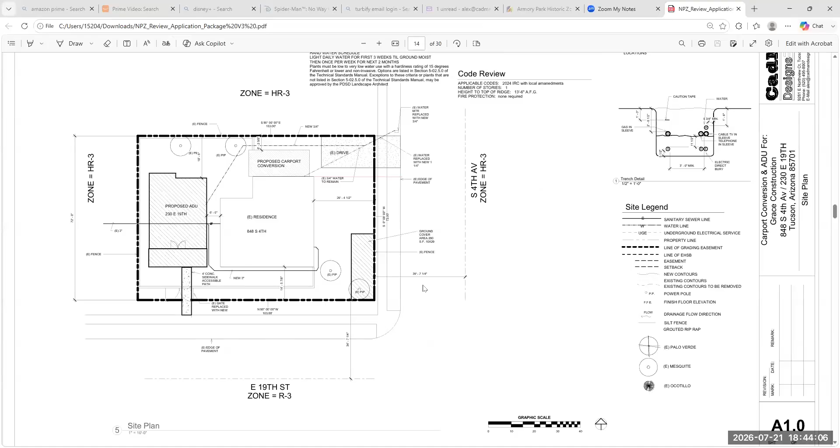So yeah, right away, as Michael brought up, moving that addition back, I did only move it 10 inches. So if that's a concern, we can definitely look at either moving it back more or turning it to stucco. I'm okay with stucco, however, I think aesthetically it won't look very appealing to have it all brick and then that part stucco, because it's going to look like a big eyesore. So I would be more open to just shifting it back.

You are correct that the 10 inches is to stud, so if we had a 4-inch brick, that means we'd only have 6 inches of recess. With that being said, I'd be okay doing a whole foot or two to give it good definition as a face veneer, if that's what we're looking for, because what I have here is only 10 inches.

Quick question - that drawing shows the rear facade flush with the existing house, but on your revised site plan it shows it pushed 2 feet back. That's just an error, this is line work. The other thing is the 3D, so that would be incorrect on how that's represented.

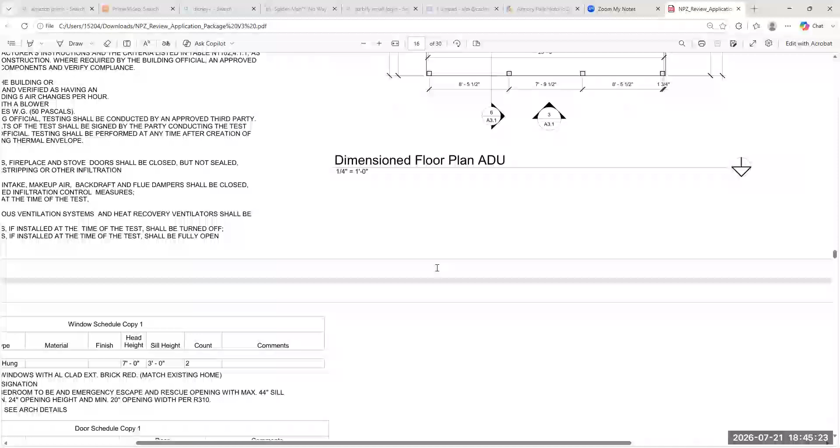I noticed the drive didn't change either, and it's still in front of this area, correct? Yeah, that was one thing - when I took my notes in the last meeting, I didn't take that down, then I saw it in the comments and didn't know what it was for, couldn't recall at all. I recall that's all existing, so it's not anything of concern. And we're not planning on changing the chain link fence in the front yard of this building.

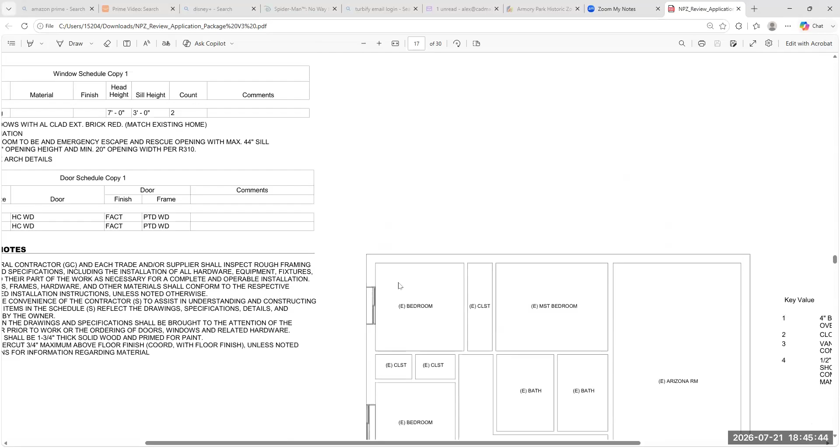No, nothing like that. The driveway will remain. So you'd be willing to push the whole area back and then maybe do a different facade in front, but perhaps brick or a brick and stucco combo on the other sides? Or wood siding? What do you think?

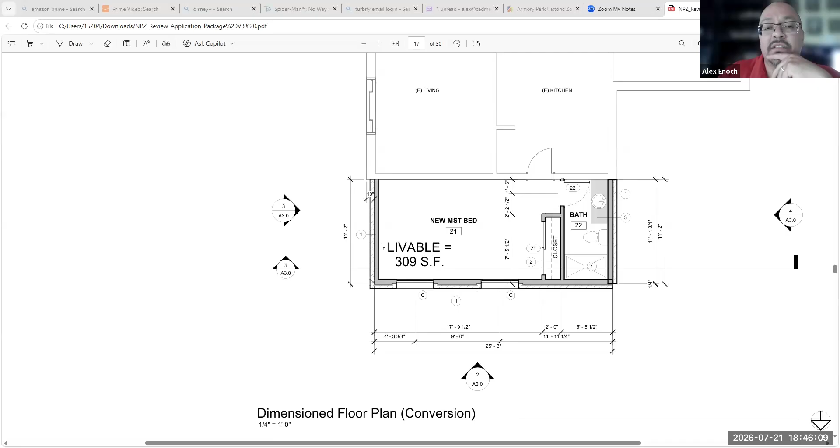I think I would definitely like to keep the brick in the front, just for aesthetics. It's gonna look ugly once you throw stucco and wood siding in there. Wood siding's not good in our weather, of course. But if we're okay with doing the brick on this side and then wrapping like 3 feet and then the rest stucco, I think that would be fine.

If that's what we're looking for. As far as pulling it back a couple of feet, right now that room space is 17.9, that's more than enough room. So if we can go up to like 15 feet, it'd still be a decent sized room for a master in that area.

So what is that strange notch in the back, in the northeast corner, where the brick faces you're showing don't meet? You have a notch in the corner. It's just the way the program didn't clean up. There's nothing special happening there.

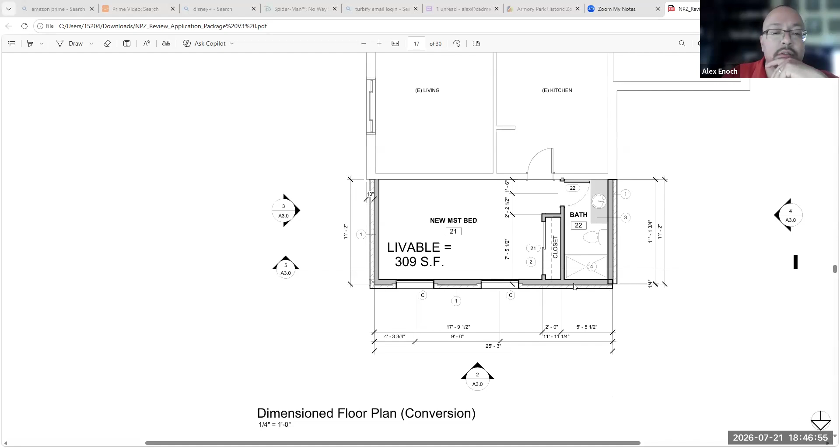Okay, any comments about the planning department's recommendation that you put some sort of fenestration and not leave a blank wall in the carport area? What do you mean? Well, Michael just outlined it, that a blank wall is not something we normally approve on a front facade of a building. I mean, adding a window here.

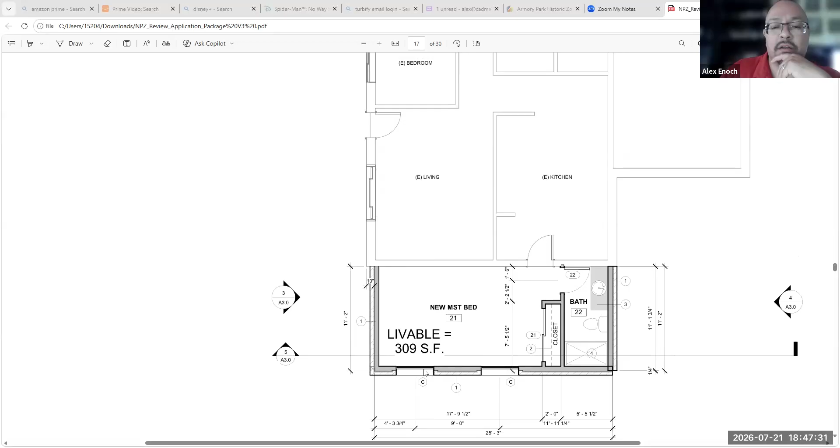Yes, yeah, I don't have an objection to that. If anything, I would like to have just one single window here and then lose these two. I think that'll allow us to set the furniture better in there anyways.

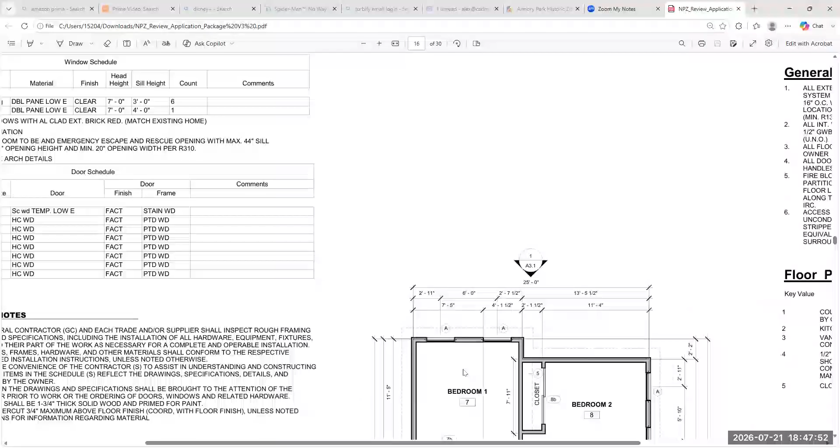Well, then you would be creating an entirely blank face on the south. And I realize that your Arizona room that was added in the 70s doesn't have any windows on it, but you're still presenting a lot of blank brick walls here. Although you should correct your plans, because there are windows on the south side of the main house.

That blank wall you're speaking of would be on this side then. This is right up against the neighboring property, and it's actually heavily vegetated right here, so you would never see those.

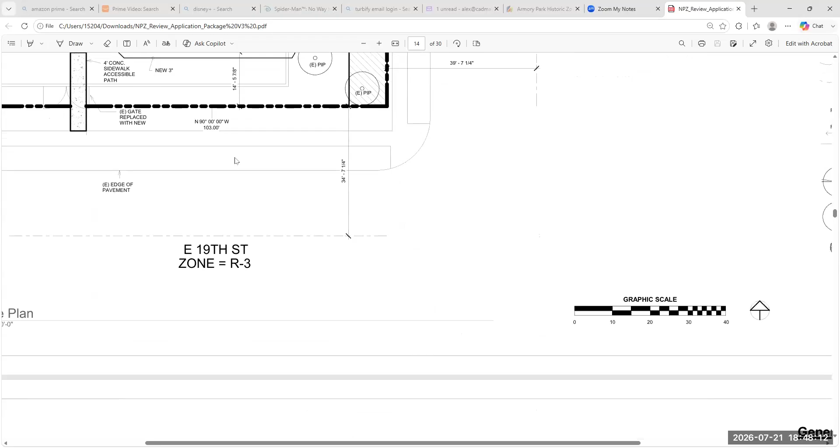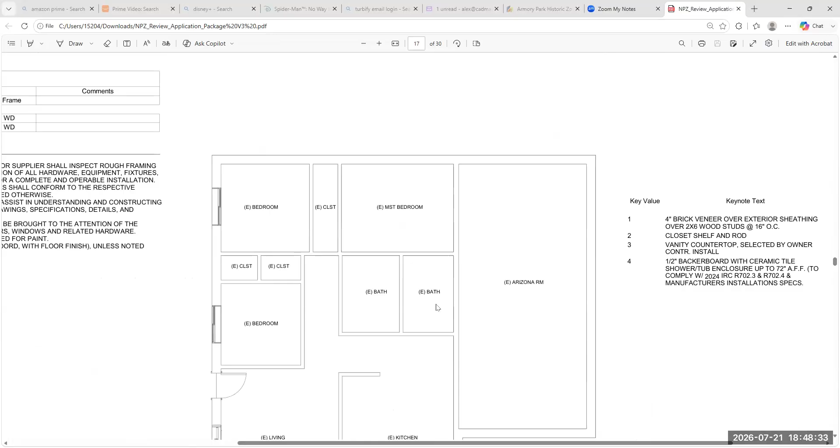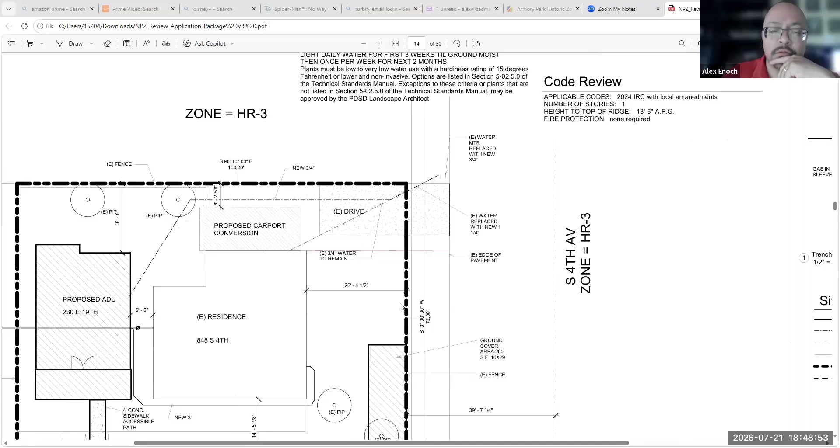Well, it shows up in your photo of the back that there is a porch there, and a window, frankly, probably in the shed that you're proposing to demolish. Have you been there? I mean, I focus on what's part of the work. We're not doing any work over there. Okay, which I ask that you focus on as well.

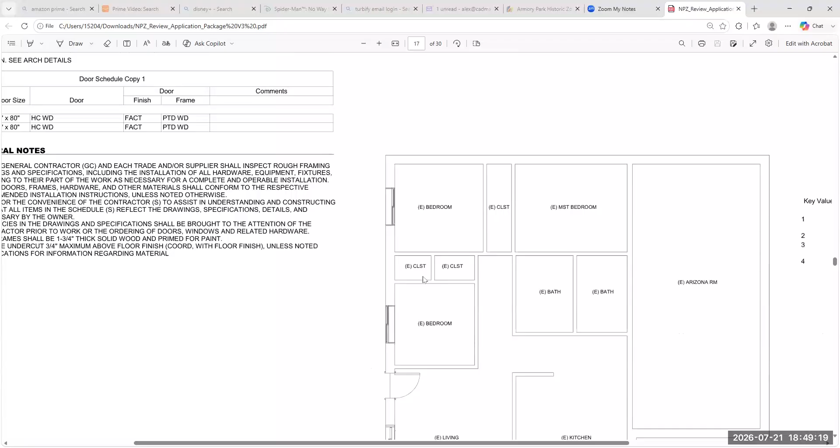Okay, and the other thing Michael mentioned, one of our conditions is that the window configuration should match the historic window configuration, which I believe is vertical paneled. I believe currently there's sliders on it because of the age of the building, it's in a wonky construction, but they are vertical panes of glass instead of horizontal panes like you're proposing.

Okay, so we can lose these two windows and we'll throw a slider here, and I'll shift this back 2 feet to give it some more reveal. Well, we'll have to clarify materials because there isn't a materials list yet.

Okay, I'm going to open it up to the board for comments. I still have a bunch of questions, and we haven't even gone to the ADU.

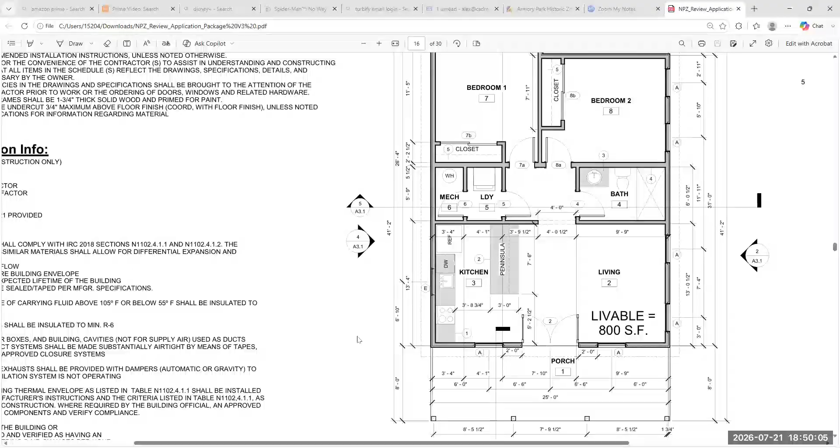I will say that when we said turn it around so the entrance is towards the south, in my mind I thought it would be more of a mirror image. So now all the windows are facing the blank brick wall of your Arizona room, and there's hardly anything on the west side. But just a comment. Okay, Stan, you're first.

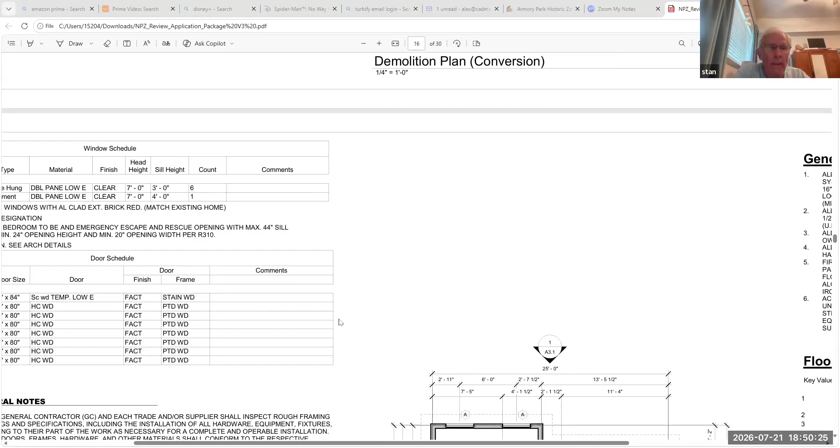Yes, I had the same comments that you had on the setbacks versus the floor plan and the site plan, and also the windows. So I think that's been taken care of.

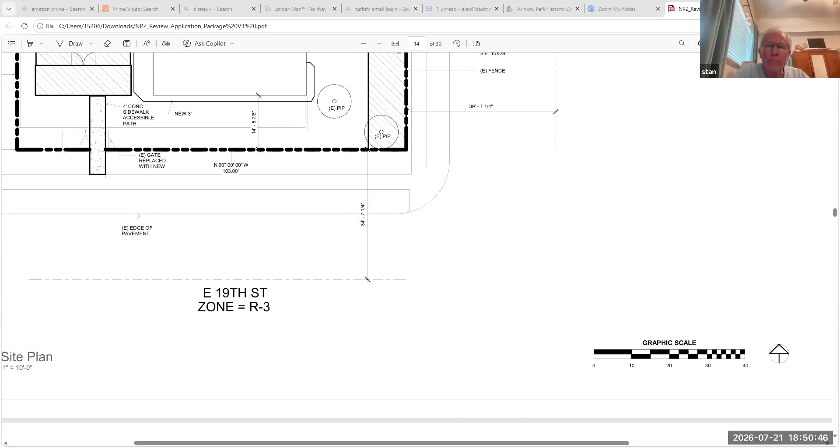The other questions I have are dealing with, and this doesn't affect any approval of yours, but I don't understand the new water service. It looks like you're going with a 3/4 inch water line, but you're going to add a new 1 1/4 inch water line on the property, yet going to the water meter. Then what happens after the water meter? Are you going to put a new 1 1/4 inch line from the water meter to the main?

I don't know how this relates to the HPZ review. I'm just saying, from a standpoint, are you going to dig up the street? Because if you're going to do it, you should do it now.

Yeah, there will be a right-of-way permit for it when they dig up the street. Okay, but you understand that they're doing the paving here real soon, which will put a 5-year moratorium on digging up the street. And they're paving that'll be it. That'll be a city comment and the contractor to deal with when they go through that route. Okay.

And the other question I have, it deals with the utilities again. You got a sewer line that you're showing coming out of the bedrooms on the south side that's going around to the house. I'm not too sure I understand that.

Again, then how does this relate to HPZ? I'm sorry, how does your question relate to HPZ? It doesn't affect it. It's not going to change the approval one way or the other.

It's just, I don't understand why you're drawing that on this plan right now that shows it coming from an existing line, I'm assuming a 3-inch line, and you're coming along the east side of the new ADU and then going along the south side of the existing house and then into a bedroom. Is that a new water line or sewer line that you're putting in?

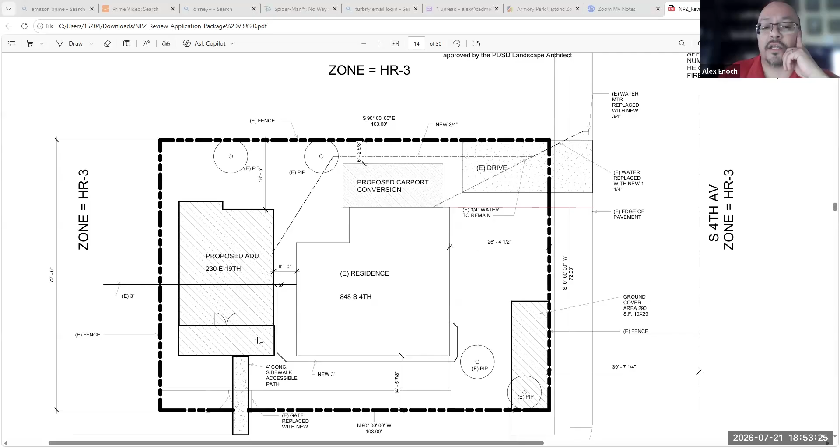This is two projects, so we got to make sure we deal with the addition first, and then we'll move on to the ADU and the ADU questions. Okay, then I'll clarify it for the board.

Stan, can you unraise your hand? Other board members, questions or concerns about the main residence, fenestration, setback, blank wall, brick options, etc. Who wants to start?

So let me just add, Mr. Chair, that consistent with what Stan was saying, if you look at the staff report on the enclosure, we're also of the same opinion like Stan that if a gate is being proposed, the applicant will need to provide the elevation for the gate.

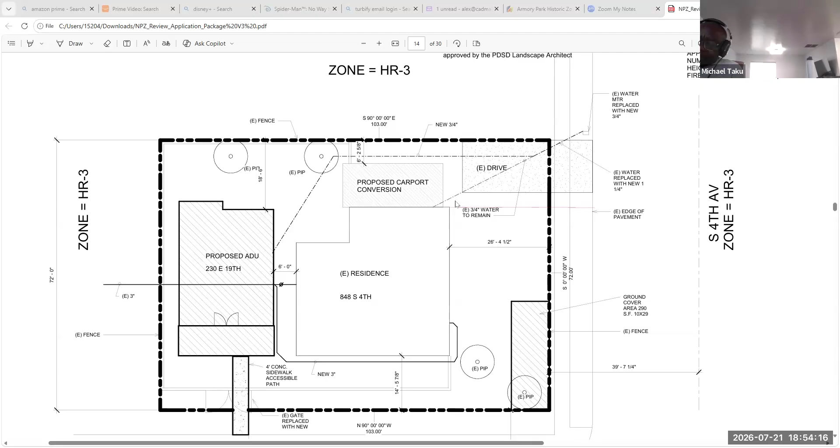This is true, but Alex hasn't yet presented the ADU. We would defer that discussion. Okay, Alex, why don't you go ahead and finish that part of the proposal and then we can talk about anything.

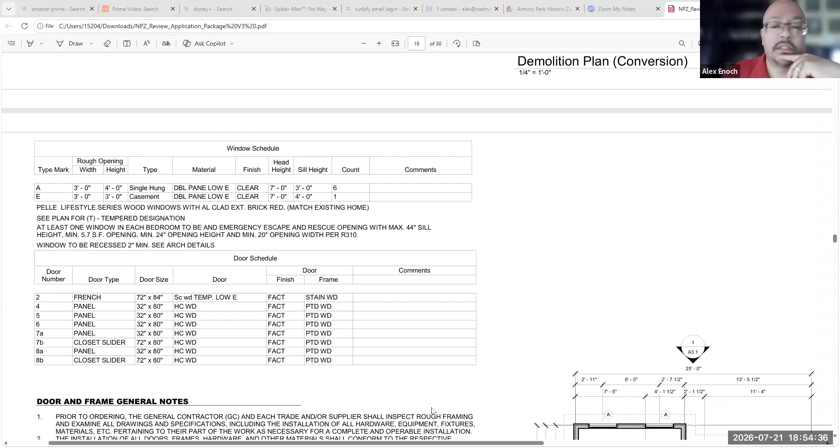Okay. All right. So yeah, that was the comments that we had to deal with for the addition, the pop-out window, and then you wanted to make sure it was brick or veneer, so I just made sure to clarify that now with my details in the plans.

So let me go to that part here.

And the brick that you were proposing, is it similar in color and size? It will be, yes, 100%. Okay, I'm gonna try to get closer if anything.

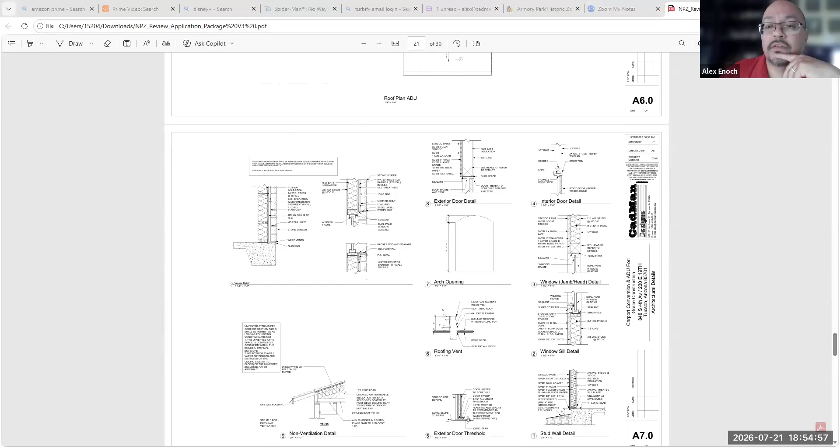So here now I've called out the anchored stone veneer. So it'll be a solid stone brick veneer, but it's the 4-inch anchored. It's not adhered. That's what the details will call for.

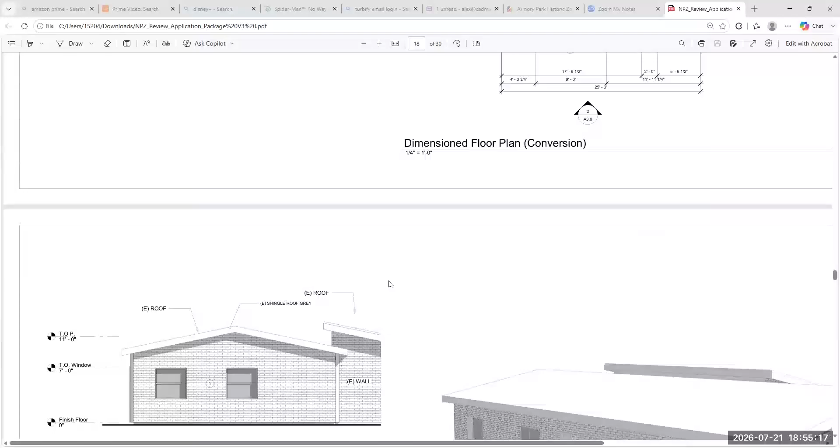Okay, go ahead and let's walk through the changes to the ADU, because it looks like it was just a 180 flip. Pretty much, yeah, because that's the comment we received on it. So we had the comment to rotate 180, so that's what I did. I did rotate it 180. We had to change the access.

So now I'm utilizing that gate that's there. That's the access right off of the street. And then we wanted a new gate. I did call for a new gate. That's what this note is saying, existing gate replaced with new.

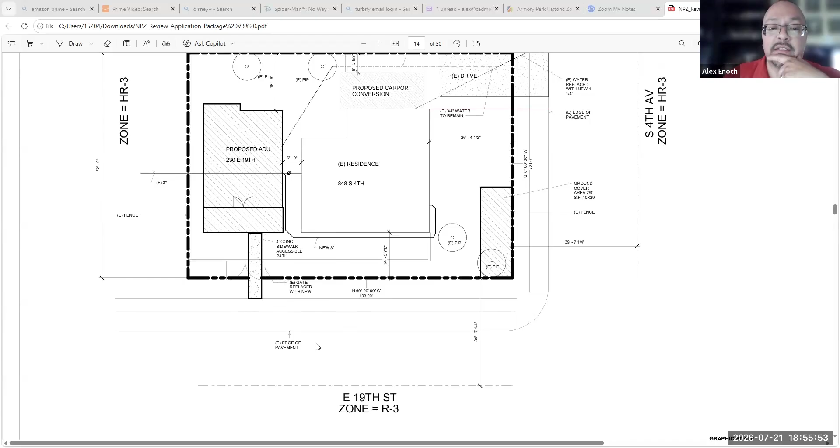However, you're right, I did not provide any sort of detail on what that gate will be. So if we want to see something, I'll have to get that from the contractor, since the contractor is the one doing the work on this. And that you don't have. Okay, yeah, that would have to be turned over for a minor review for the replacement of that wooden gate.

And something else with your program, it says the north setback is 18.6, but because that bump out for the one bedroom is 2 feet 2 inches, it's actually 16.4 for your setback from the north. I assume they were trying to line it up with the main building when the drawings were done on your plan. And can you tell me, if you're allowing 6 feet between the old residence and the new residence, what is your western setback?

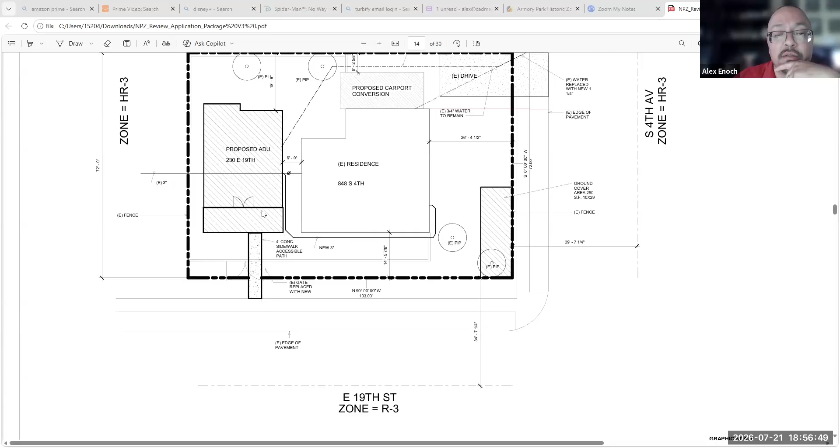5 feet. It's still the same setbacks as it was. It was 5 feet building, then 6. So this is still 5 feet over here. Okay, yeah. And then what this is, is I'm flushing out the porch that's there to the face of the building, so the building itself is set back quite a bit now.

Okay, so your kitchen window will face the western wall, but bedroom 2 will face the back porch of the main house, and the door to the kitchen and the living room will face a blank wall. Is that correct? Yeah, really close in proximity. I mean, if anything, I might even want to just lose these and move this one over here, because it's really close. 6 feet's really close.

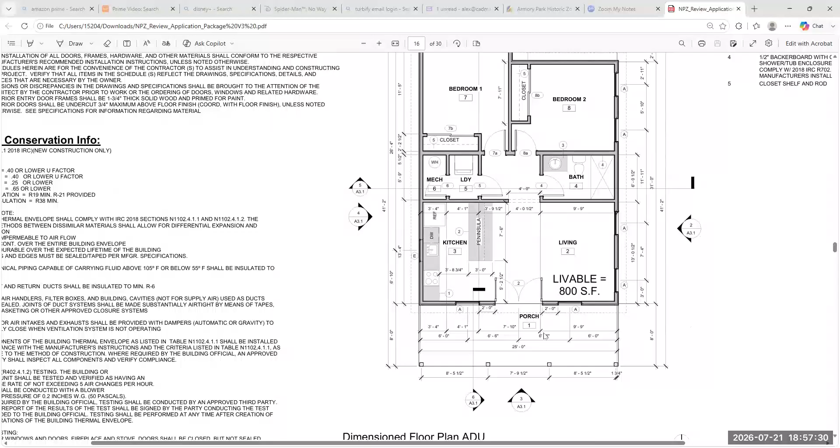But this is the side that faces the street now with the porch, the doors, and the 2 windows. Well, all of these things are little things that if you want to continue to change, you can always ask for yet another continuation. Anything else on your revised plans before we get to the board? No, I think that was your guys' comments that I dealt with. Okay.

All right, I'm going to go through roll call. Stan, you've addressed the fence and the pedestrian access, which will mean we'll have to do a minor review for any gate that goes in there. Yes. Anything else? No. Okay.

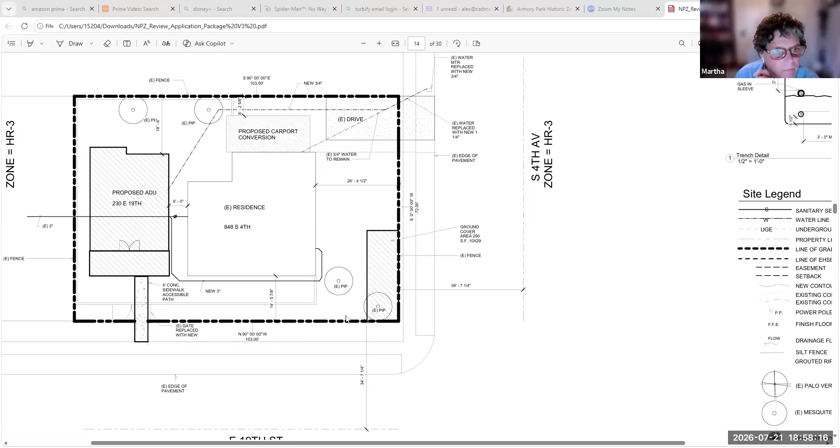Martha. Nothing is coming to mind. What are your thoughts about the staff comments on the replacement extension for the main house? Who, me? Am I the one to ask questions? No, just teasing. Going back to trying to keep up on my own with the plans.

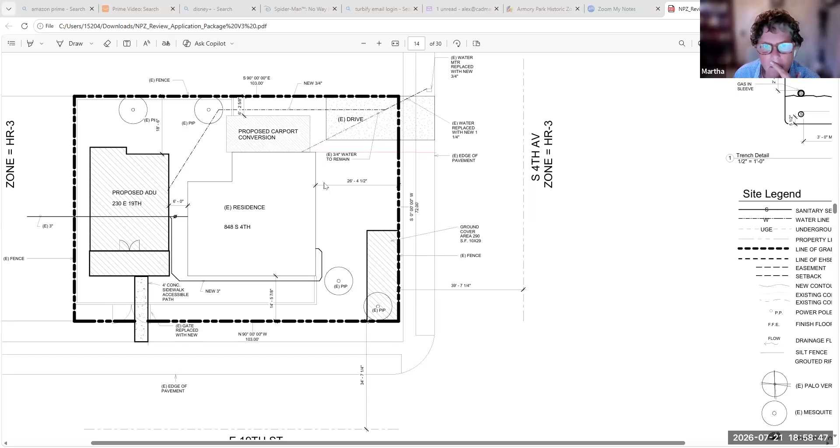So may I see the extension again from the main house? The plan of it, this one. Yes, porch, here's the bath. So we could put a window in it and stucco it and close up one or more on the north side, or stucco the whole thing, or set it back 2 feet into a smaller room, still with a brick facade, or thoughts?

Well, I don't think everything has to be stuccoed. I would think just maybe even a change of brick style would be noticeable, and it wouldn't be trying to be a false representation. So that really is... I think a window would be lovely, but I also believe that the people that want to build something should mostly be able to build it. So thank you, I'm done.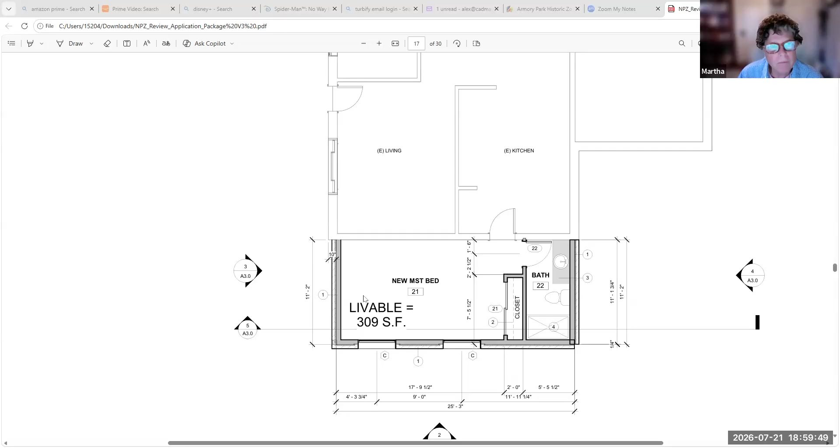Thanks, Jan, questions? Yeah, I actually brought up the window thing at our last meeting and I thought it was included in the notes, but I wasn't at the meeting and missed that. But I do think the window would be important in terms of just reducing such a long, expansive blank facade, a window of some sort. I also think setting the room back a little bit from the front more than it is now would help, be at least slightly reminiscent of the carport and show it as a distinct, separate structure.

If it were set back, I don't feel strongly about a materials change, if it were set back noticeably. Let's see, there are other options. It could be a brick pony wall with stucco above on that facade to differentiate it. Brick, yeah, I do. It's a long facade otherwise, especially without the windows, and kind of unusual. But yes, you're right, there are other material options they could explore if they were interested.

The discussion about the windows, and maybe there'll be some on the north, maybe there won't, maybe there'll be some on the east side, maybe there won't.

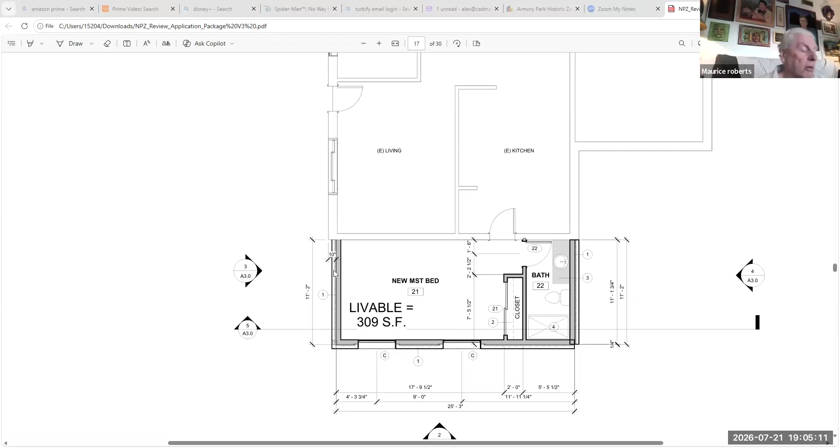Yeah, this is what I think. Okay, Matt, comments.

I only have one comment, and I'll get clarification from the rest of the board if I'm missing something, but I thought lots that were under 6,500 square feet had a max square footage of ADU of 650. I think that was the original proposal, and I think the state law changed it. Am I correct, Michael, that it now can be somewhat smaller, but it can be substantially larger than the original ADU law? That is correct, Mr. Chair. Okay, good, then no other questions.

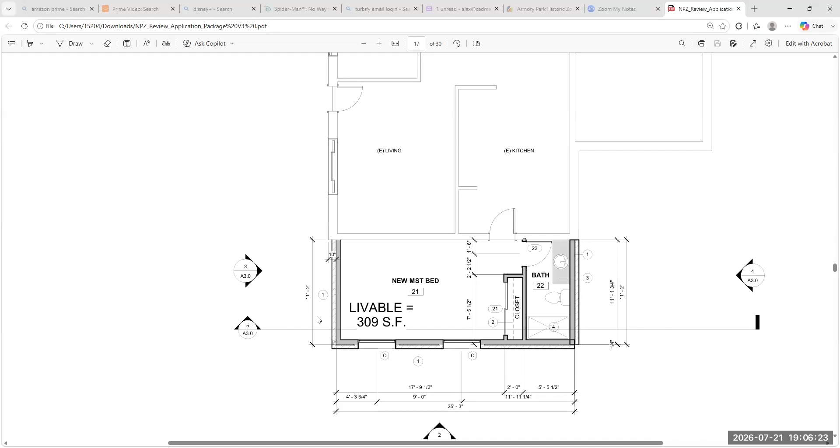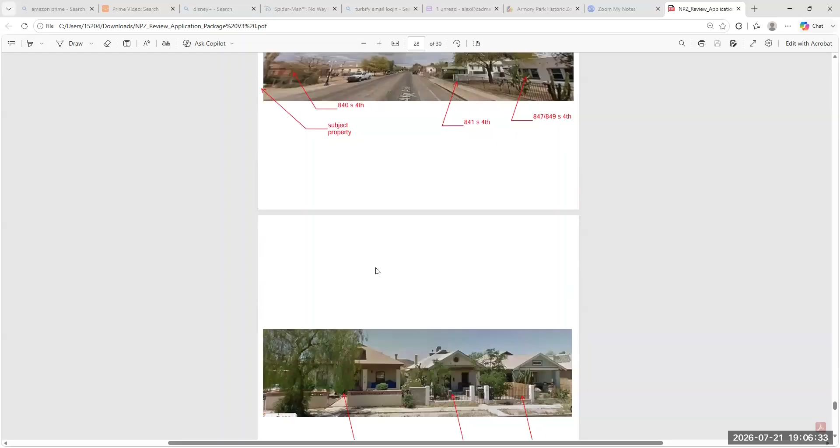Okay, Lynn, comments? I got confused, as usual, about what the carport is made of. Well, it has a single wood post on the, let's see, northeast corner, and then the back of it is supported by a masonry shell that houses a shed, with a space between that and the backyard that you can walk through.

Although it looks currently like that back wall has been filled in somewhat, and in fact, can you show us the backyard photo? Yeah, you can see there's a wall there or something. Now it shows that there's actually a window in that shed, and it's not brick or may not be brick. There's another photo that shows the back of it. There we go, and they've added the electrical panel where the old walkway was. No, I guess the walkway is there. There's a window at the back of that shed. It's either painted black or it's wood battens instead of the masonry that they're showing to demolish.

It has the electrical panels and another metal slider window. You can see there is indeed a kitchen window and a door into the Arizona room that has

horizontal sliding under the porch, which PDSD has talked about. The odd angle above the eave also has wood siding on it on that north face, and we never got that elevation for us to see, but it does have a brick pony wall. So we're talking about all sorts of different options that will make this somewhat consistent, but also read as a

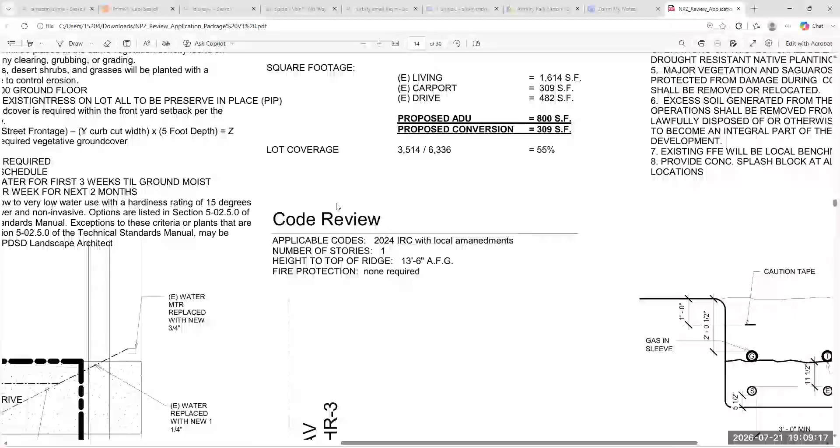It has, I think, a picture window in the living room with two side vents, and then there are apparently sliders in the two bedrooms, and also sliders in each of the bedrooms on the south side that aren't shown on this plan.

And are they metal? Yeah, it looked like they were anodized aluminum metal. Yeah, okay.

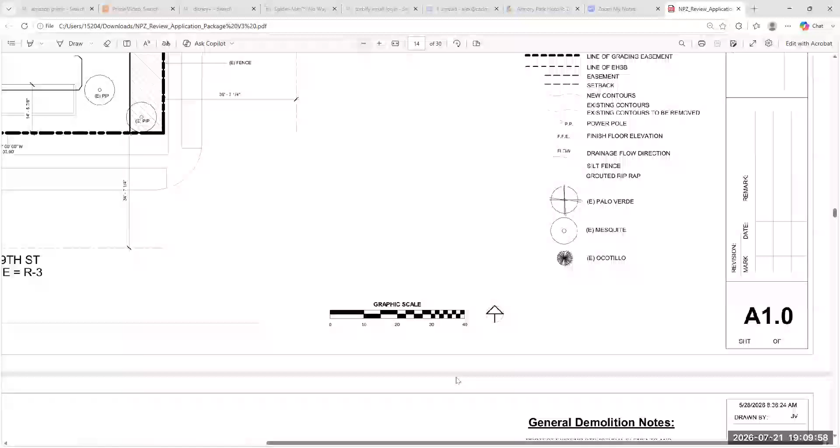Well, we can't really approve aluminum per the code, but we could do metal windows or clad wood windows that have that same sort of vertical configuration for whatever is done on the main building so that there's a compatibility factor.

What do you think, Alex? Yeah, I like that. That's set. Well, I'm going to nix these guys. I'll throw the slider over here that matches these guys over here, which are 4x4s.

Could put it right in the middle, maybe one in the bedroom, but leave the center one, or do something with that on the north wall so you don't present yet another blank wall?

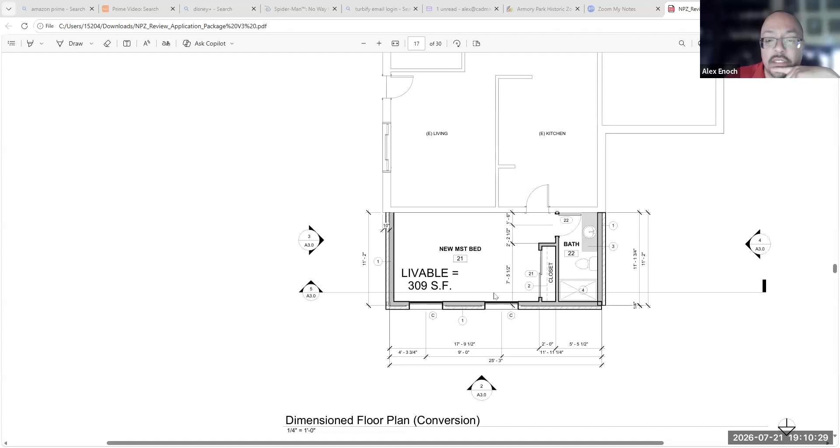Okay, that's fine. I'll nix this one right here, and we'll keep this guy, and then switch this one to a slider, and you could leave the same footprint with a pony wall with horizontal wood siding above that, to match the north wall of the Arizona room.

Agreed. Okay, do you want to tell us what you're thinking? If you've got your contractor on the phone, can you tell us what you're thinking for your pedestrian gate? Is it a single gate with a fence in that 6 foot, 8 foot opening? Is it made out of metal? Is it wooden pickets?

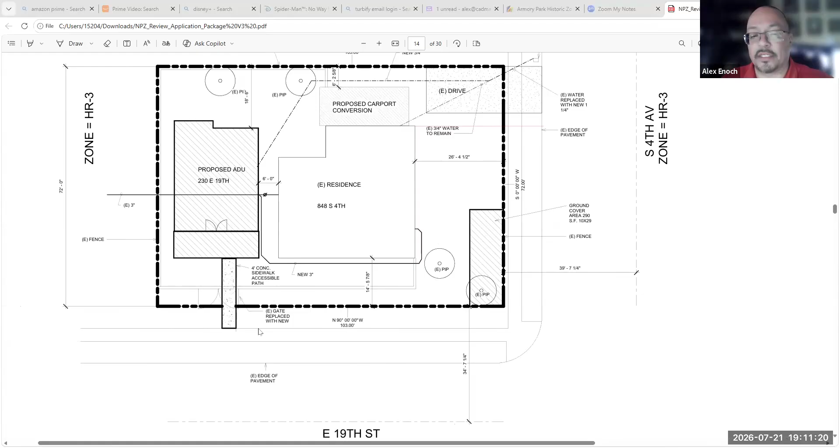You'd have to come back and meet once a revised plan and a motion is made tonight, then it goes to PRS, the plans review subcommittee of the historical commission, and they make all their comments. Then a member of that commission and a member of this board will come and see your plans for your pedestrian gate and say yay or nay or how to change it, because we did request that last time and they are not here.

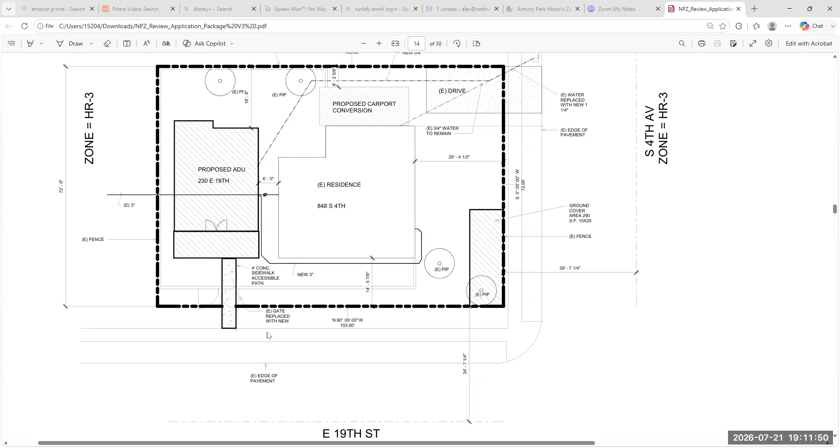Yeah, that one I would, because I doubt I might get enough information from him for you guys to say yes or no on it. So that one I would definitely do as a separate review, and just do these ones.

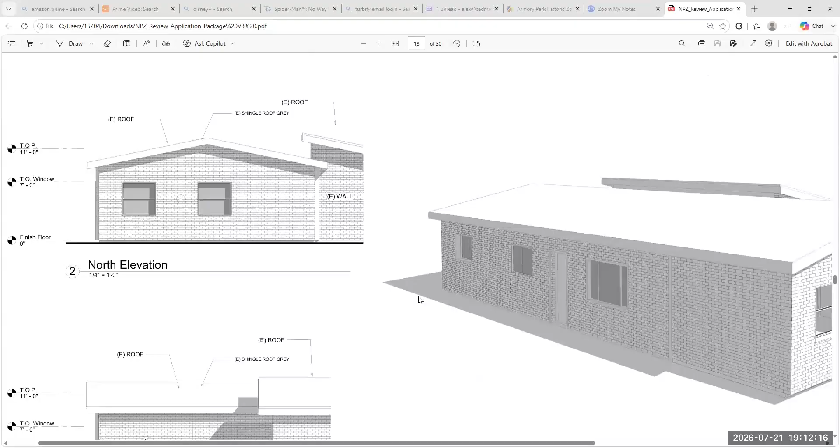Okay, so you're willing to do metal clad wood windows in a vertical configuration like casements for the main house. There's no problem with the windows on the ADU, they're appropriate, you already did those, and they can be separate styles.

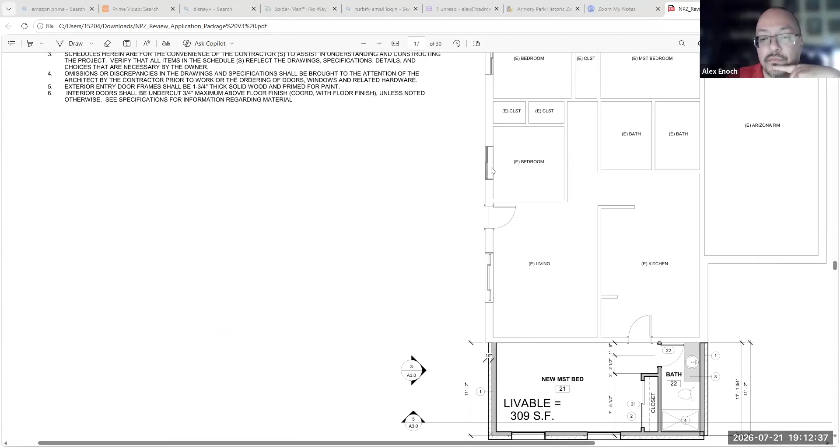Correct. Okay, but the windows you put on will at least match in configuration the existing on the house. Correct. Okay. Is anyone writing this down so we can make a motion?

I'm trying. I'm trying to, but I still have a question.

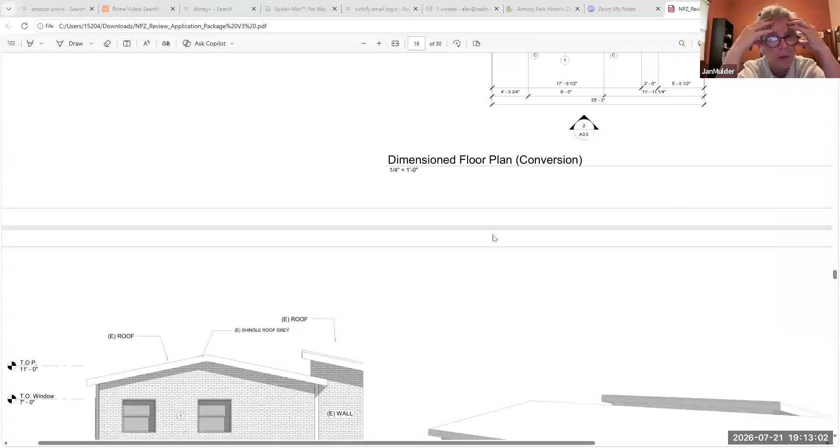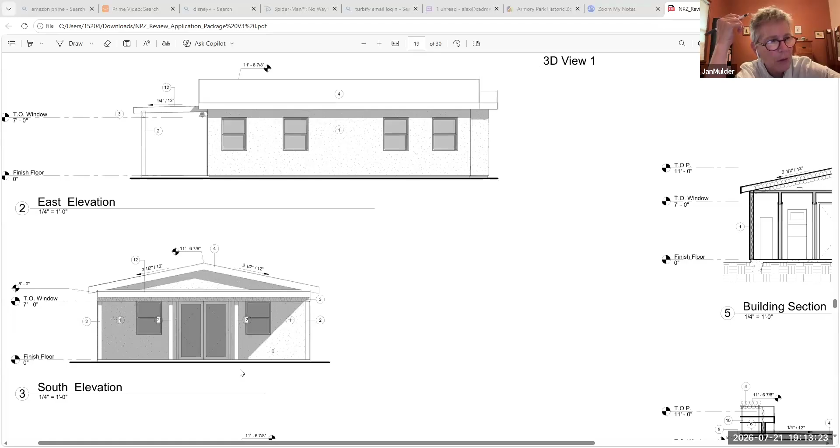Okay, sure, Jan. I'm gonna be the nattering school marm on this one. Right now, the front of the ADU has a high wall all across the front of it, and this is presenting as the front of this dwelling unit. It seems like it needs to be addressed more than just a pedestrian gate. Leaving it till after the builder has approved plans to maybe have a minor review at some point just makes me uncomfortable.

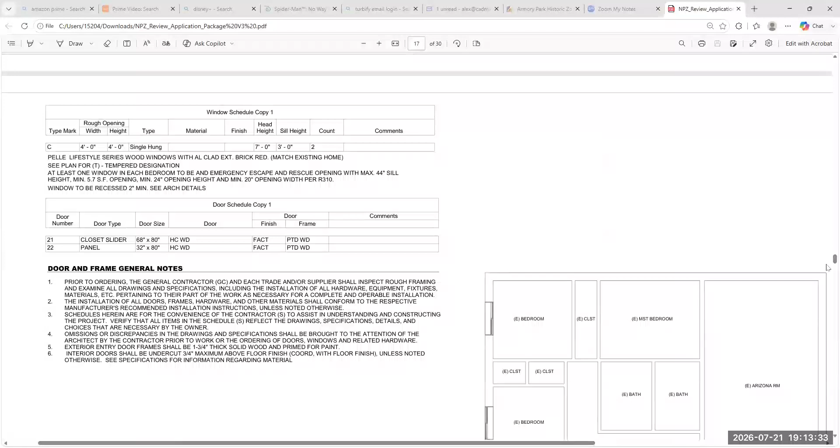It's tough. It's an 8-foot opening because it was an access gate wide enough for a vehicle. I don't know if the photo is on this particular set of plans, but there it is. It's got some rotten cedar gates on it, with two posts on each side.

So if that goes away and there's a see-through fence that you can see the front of the building from the streetscape, theoretically they meet the code. With just that, they could have something totally opaque except for the walkway. No, they would probably need to infill that with something open that would give a street presence.

Right, that's what I'm thinking. I'm just saying this feels like more than a minor review if the project is getting approved. You're basically hoping they come back.

Alex, do you think you could put in a simple metal open barred fence and gate in that opening that is no taller than 4 feet? Yeah, definitely. I'm okay doing whatever you guys want on that one, whatever helps you guys get satisfied.

Does that seem reasonable, Jan? Yeah, so 4 foot tall, open metal picket fence, simple style. You want them to have the gate and fence offsets, right?

You can put the gate on one side with a post and then a fence, or you can put it in the middle and put two little side panels. Either way, that's what I think will look nice. Have it centered in that space.

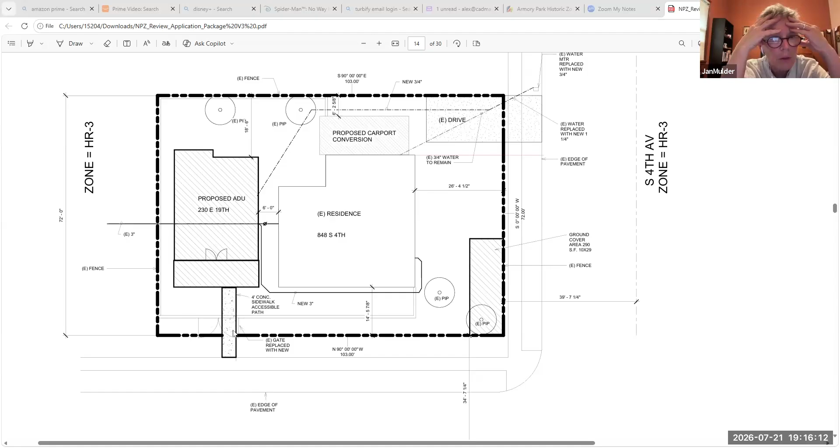Okay, some panels in the gate panels. Well, all I was thinking is we don't have to prescribe it if it turns out the opening is slightly offset, but we could certainly do that. We don't have to tell them exactly where we put it.

Just the appropriate fence that's open and visible, with a pedestrian gate, and you can see the front door of the house that way. Okay. Do you have any ideas about lighting fixtures or door hardware or anything?

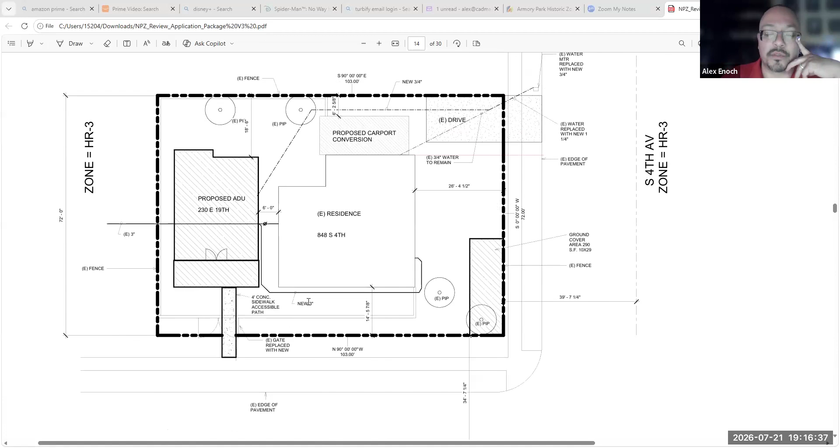No, not on that part. That's something definitely the GC will present. Okay, then hardware and fixtures on the ADU should be historically compatible.

Should we add that? Or staff? Michael, what do you think? Should staff do that one? There's a lot not here.

Historically compatible with what, the age of the main house or the neighborhood? Probably more with the neighborhood, because it's a new ADU that's mimicking a bungalow style. We can do that.

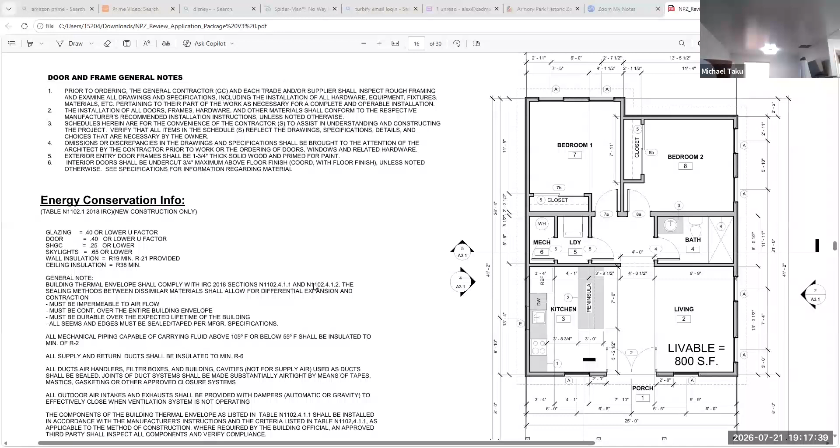Or simple and neutral. I mean, we don't want to see the deluxe Rococo that's on sale from Home Depot going on it. Okay, so hardware and fixtures to be simple or historically consistent with the neighborhood.

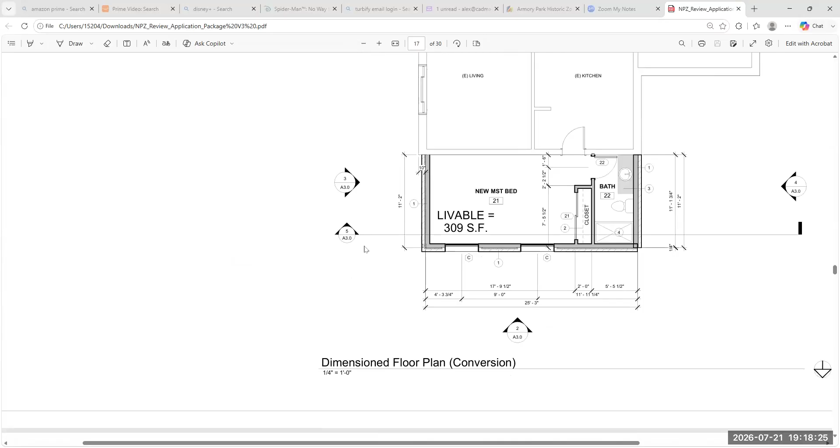Yeah. And then it sounds like we're okay to agree to the current footprint of the addition if it has a low pony wall and horizontal wood siding that matches the north side of the Arizona room, yes, with a fenestration on that wall and a fenestration on the north wall that in vertical configuration matches the form of the contributing house.

Correct. Board, what do you think? You're headed in the right direction for sure. What should we add or change?

I'm good with this. Michael, do you think that would differentiate the building enough? Almost, almost. Our concern was just brick, brick, and brick. If we used a different type of brick that someone can clearly see and distinguish, that you can see this is the existing and this is the new, that would probably make more sense. I think we could change the bond of it, because this one has a running bond.

Leaving the siding there and doing the pony wall, as you said, that shows that it is an addition enough. Yeah.

And do we need to mention that back porch, because it's existing and has never been approved for a permit? Michael, since you're reviewing that, you might as well, because zoning is going to pick up on that.

In the matter of, I'm not going to read the whole number, 848 South 4th Avenue. Two projects: one is to enclose the carport into living space, and the other is an ADU. We recommend approval as presented with the following conditions: that the front enclosure be characterized by a brick pony wall and horizontal wood paneling to match the configuration of the north wall of the sunroom, the Arizona room. That the windows on the addition be metal or metal-clad vertical casement windows to match existing windows on the house, one on the east side of the addition and one on the north.

That the existing car gate on the south side of the property be replaced with a 4-foot tall open metal picket fence to fill the opening, with a pedestrian gate to be located within it. That hardware and fixtures be simple or historically consistent with the neighborhood. And we also approve the back porch that's already constructed but not previously permitted.

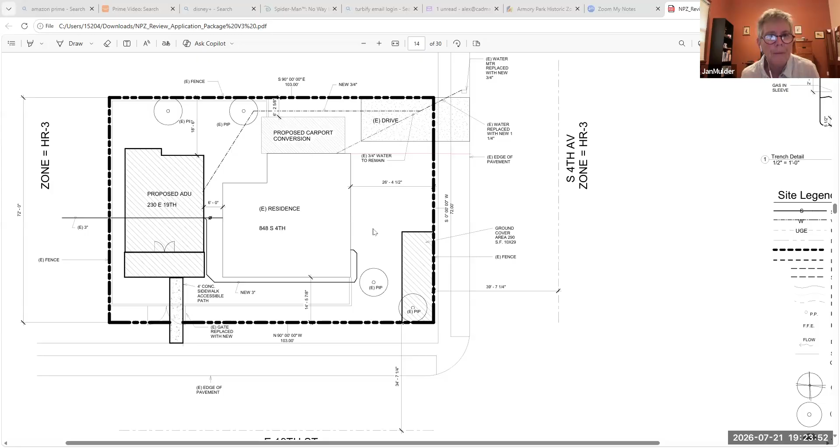You don't mind sending that motion to me on this, generically, please? Sure, thank you. Great, all right. Thank you guys, we try to work with you. Of course, I appreciate it.

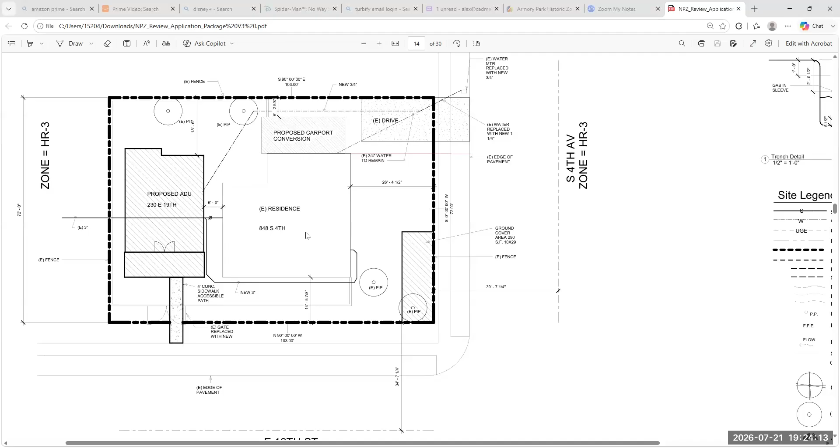And Jan, I see what you're talking about, I didn't show the porch on there at all. I didn't even know that was like that till you pointed it out now. It's a good catch. And when you take this to PRS, show them exactly this. You have to show them the same set, but you can fix your site plan. You can change your setbacks. You can write them in. You can show the doors and windows that are there and what it probably might feel like, and maybe a gate suggestion so there won't be lingering stuff.

Of course, Mr. Chair, please. PRS will actually get your recommendation, will get your motion. We want applicants to go to PRS with the same plans that you reviewed. We do not want applicants going to PRS with revised plans. Just wait until after PRS has done their review, and then applicants can revise the plans. Because you are an independent body, PRS is an independent body, so what you're recommending here, PRS might feel different about it. So Alex, please, let's not revise the plans at this point.

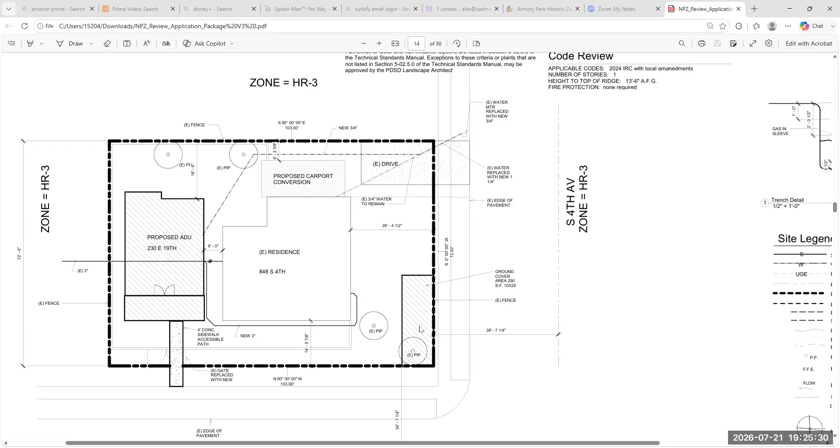That's what he was saying. Yeah, that's what he said. He said don't change it yet, just to clarify. I gave you guys the same plan. I said that Alex might want to have the options on hand to show, but still send in the same plan. Okay, of course, thank you. Yep.

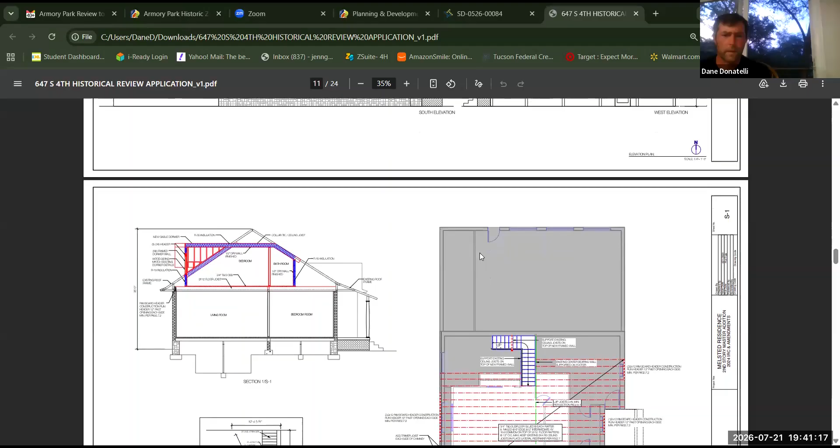And then the skylight, is it flush to the roof? Yes, the skylight would be flush to the roof. If we look at the floor plan on the second story, the skylight will be over the area of the bathroom to allow some natural light in. It's about 3.5 by 18 inches. Okay, that wasn't specified in the plans. Yeah, sorry, it's 3.5 by 18 inches.

And how much do you have to go up on the chimney?

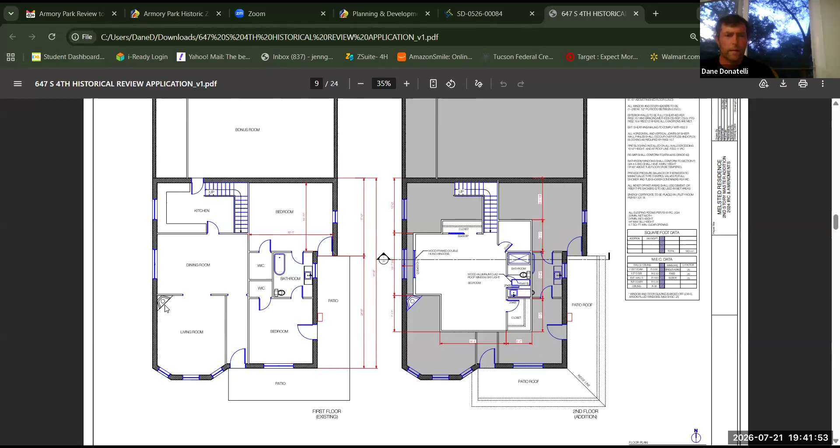Well, I think the chimney needs to go up just a few courses. Maybe 3 or 4 courses. That shouldn't be too bad.

There was an earthquake in Armory Park in 1887, and a lot of the old Victorian style houses had their chimneys toppled. You can see the one that still has the decorative trim on it in the southwest corner, but the back one they just added plugs to make it functional once it's toppled. So a lot of them are short and truncated now that once had decorative details.

But if it's only a couple courses, I think they did have that fixed maybe 10, 15 years ago. Unfortunately, I don't think there's anyone in the Laos family to ask. But if it's not stabilized, you may need to do a little work to make sure you can go up that distance. We had it repointed recently. Ah, okay, great.

You've got a lot of lumber to buy. I can't believe all those 2x12s you have to put in there to stabilize all of that. But it looks like you've got pretty good plans to my eyes.

Board comments. Would I be rude to make a motion to accept the plan as proposed? No, and we could even have a second, but Stan's got his hand raised, and somebody else on the board may like to ask a question. Of course, Stan. I guess I have some concerns about the project - not necessarily what you're doing, but what you have to do in order to accomplish what you want.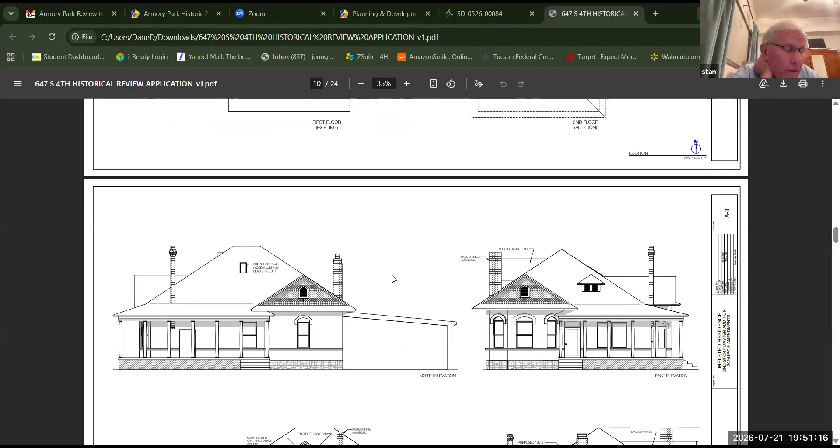That goes up to that ridge beam, and then you got another triple 2x12 that's now running east-west, going toward the front of the house, that I think is being used and cantilevered off of a bearing wall to help support the loading you're going to add to it. But what you're telling me in that drawing is that those 3 new

2x12s -- you're going to be removing an existing 2x4 roof joist. And I'm not too sure how you're going to do that successfully without maybe doing some damage to the roof again, because to get that off with those old nails that may be in there quite deep, it may be very difficult to do.

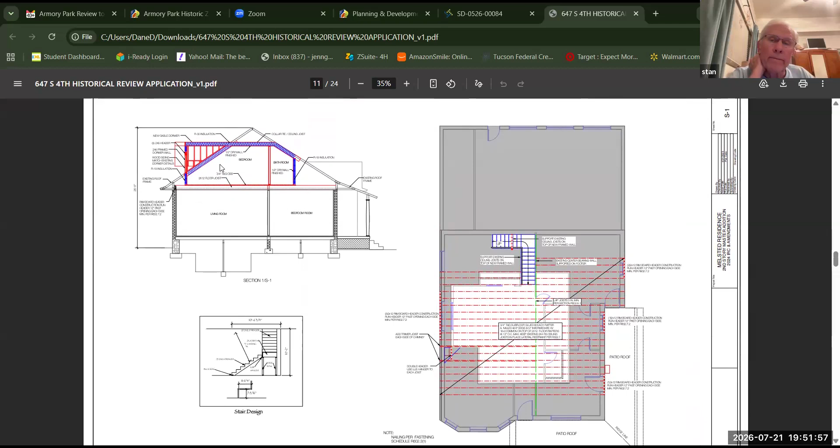And when you're doing that, you could do some damage to the roof decking again. So all of that, I think, really needs to be looked at very carefully so that everyone is comfortable that you're going to get the results you want without doing any damage to the house.

There's another case on my street where they thought they could get away with taking out a bunch of the supporting interior brick walls, and discovered that, lo and behold, they could not. We don't want to get away with anything.

We want it to be done correctly. I agree, that's why I'm bringing it up. If you're aware of it and you've looked at it and you understand how you're going to do it, then fine. I'm backing off, I retract everything, but I do think a structural engineer is critical at this point, because when you start tearing it apart, you may find yourself in more trouble than you think.

That could go into a motion as a recommendation without it being binding. But welcome to the neighborhood. I hope your house doesn't fall in. I think it's going to go okay.

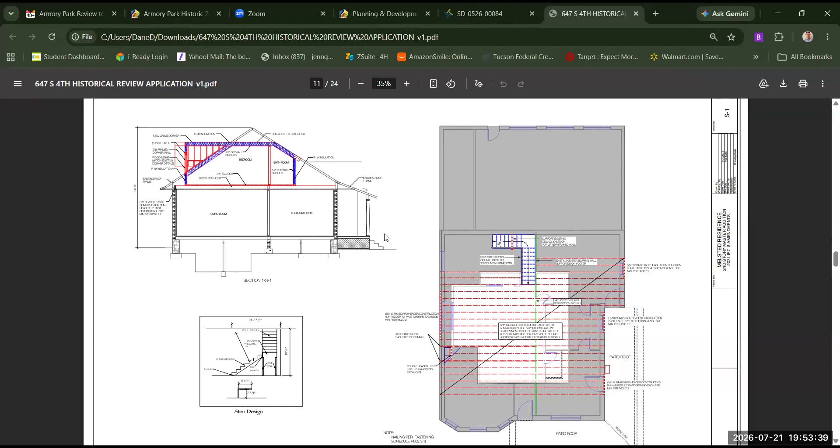But yeah, these houses are tricky. In one of my houses, the studs were 2x4s nominal but 26 inches apart, and I had to put in new beams in all the rooms below to hold it all up. The other house was built strong enough to be insulated with 2 feet of lava rock, put in around 1900, so that one wasn't a problem. But when they took out some of the center beams, the center of the house dropped 4 inches, and the whole house had to be jacked up and steel framed.

It's a learning curve. But I really like what you've done on the exterior of the house. Oh, well, thank you. Which is our purview. And I have some other questions now that deal...

I have some other questions that deal more with the detailing of what I think should be addressed. One of those deals with, if you go to the roof framing plan - that's the floor framing, if you go to the roof framing plan, next page.

Okay, you see where that existing chimney is beside, on the west side of the new dormer? Right here. Yeah. You're showing your roof eave on the south side of the new dormer. That last roof joist is extending out and beyond, if I'm looking at it correctly, beyond the edge, the south edge of the chimney.

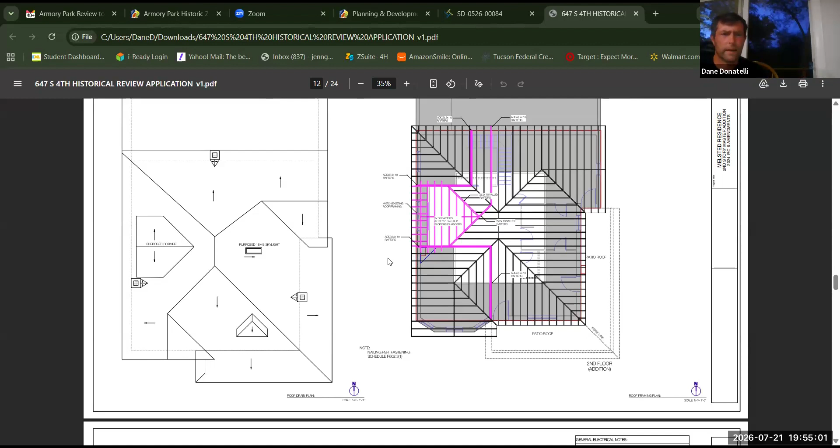But that might be the lower portion of the roof. It stops here, and then you just have the continuation of the lower roof, right here.

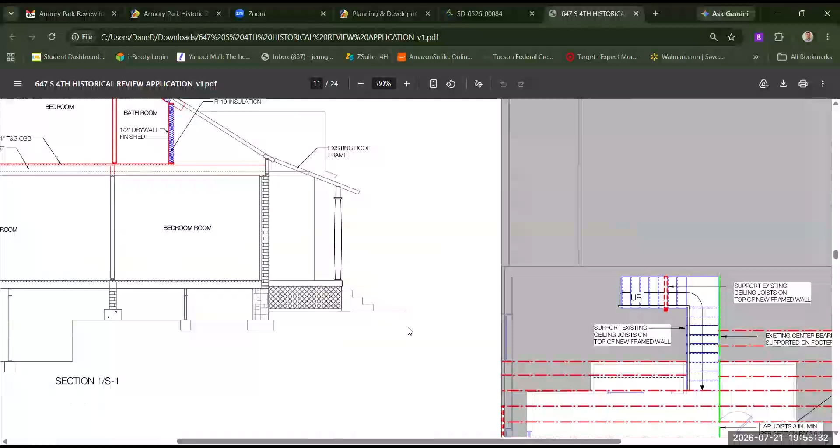So you're suggesting they may need to modify their crickets or replace some of them to deal with the change in the runoff stand? Well, I don't know. I think it's a little bit of a problem. It's a tough detail around that chimney.

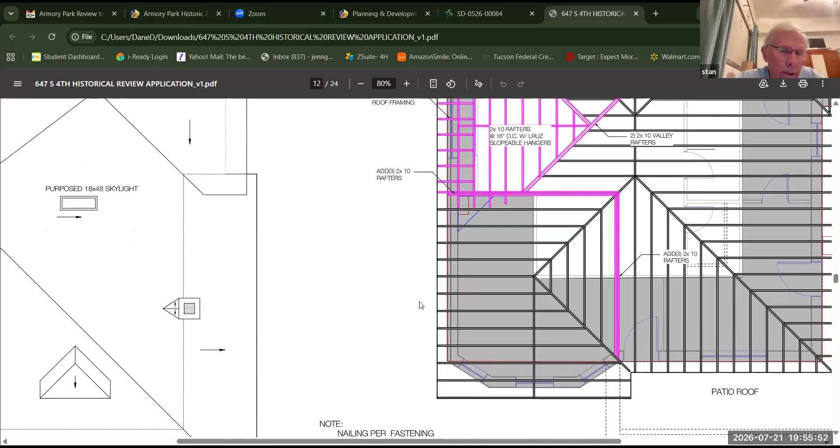And the reason I bring that up is because if you look at the eave detail of the existing house, it's got a flush eave - I mean, it's a soffit underneath it. Look at the section. You see on the south side the way that soffit is perpendicular to the wall, so it's a flat soffit. It doesn't follow the line of the ceiling joist, the roof joist.

Is that the way you're doing the soffit on the dormer? No, it would be consistent. Well, I mean, yeah, I guess we could do it that way. Yes. Well, I don't know.

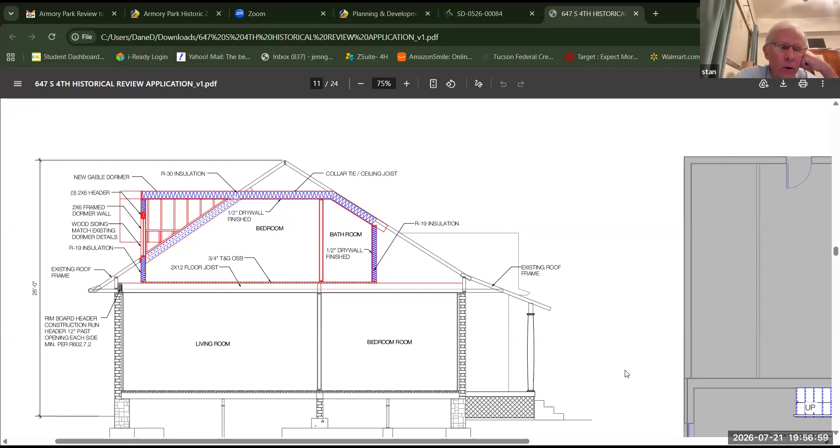The problem is it causes a problem at the chimney, and when you turn the corner on the south side of the dormer, you can't take that soffit all the way across like you see on the front elevation of the house, on the west side, where you've got a continuous soffit. There's a name for that - let's see what.

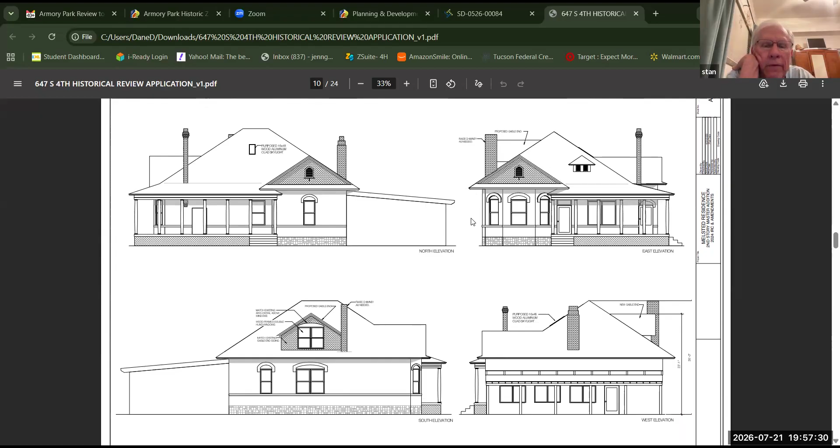It's called a horizontal cornice. If you look at the east elevation - okay, stop that - you see the east elevation? That's a pediment type end gable, where you've got that soffit that goes horizontally across at the bottom of the roof eave. You can't do that on your dormer because of the window. So what you could do is what they call a classic cornice, where the soffit frames around and does a very short, stubby soffit.

If you can look on my picture here, can you see what that does?

Can you see that? Yeah, that little return - they call it a return, they've got several names for it. It's called a pork chop or a poor man's cornice. It's one way to do it if you're going to have a cornice or eave detail like on the house. If you don't, if you just maintain the eave with the slope of the roof, then all you have to do is put a fascia on the eave, which makes it easier to terminate in front. It's not a problem.

So I think we need to decide what you're doing, because it looks like that's what you're doing on the south elevation of the dormer. If you look on the left-hand side, those notes are in the way so I can't see what's happening to that dormer. I believe on this set of plans it shows just a fascia board at the end.

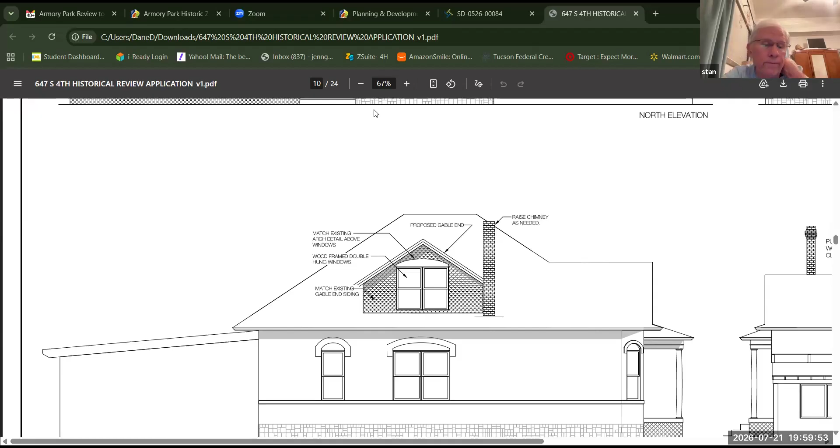Now let's look at the window. Go back to the window on the west elevation of the drawing. Go down - all right, now on the west elevation, you're calling it the east elevation, but it's the west elevation. You see the vent in that opening? Yeah, right here. That has a wood trim around the vent, and you're going to need a wood trim around that window in order to terminate the wood shingles. You can't just terminate the wood shingles because that window is set back a couple of inches from the face, and you just can't handle that.

You're going to have to bring the wood from the window frame out, then put the wood trim on top of that, and run your wood shingles into that wood trim. So that wood trim needs to go around the window - that would be on the jambs, on the sill, and on the head. Right, okay.

Let me see. He is the licensed architect. He's done a lot of these. It's good, and he gives very good advice. All right, I don't know that.

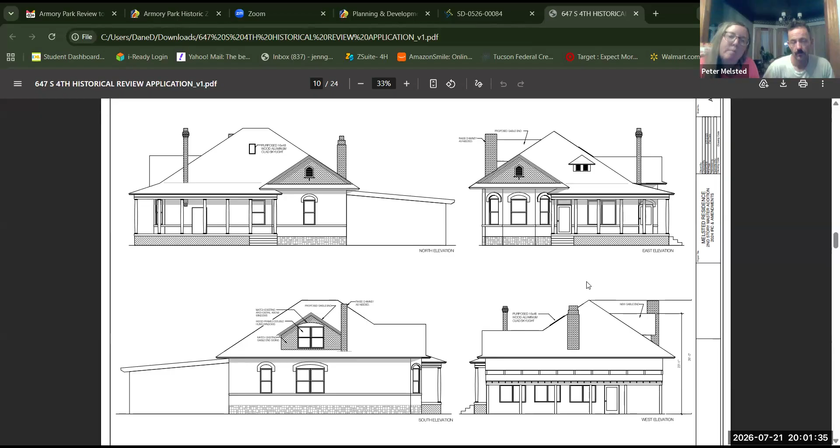All right, you show on the electrical plan - I think it's the electrical plan - that you've got a split system. Yes. And you've got a wall-mounted unit, and then an outdoor condenser on the roof of the bonus room. Yes, that's a 12,500 BTU unit. How big is that, do you know?

It's a multi-port unit. The exterior condenser, which is on the roof - I don't know off the top of my head, but I know it was rated for larger, and it has another port for another head. Well, I guess what I'm saying is 12,000 BTUs seems like a fairly good size, so it may be a large unit. I was wondering if we could maybe move that more to the center so we don't see it from the side.

Like on the other side of the chimney, or from 16th or 17th Street. Yeah, so that should be able to be slid over to the north side. I think I would prefer it over there, so at least you don't see it from 17th - or you shouldn't see it from 17th if it's back that far, because it's probably a vertical, slim, thin unit, but it could be tall.

Now, it's already there right now - it's currently existing there. What's it serving? The inside of the house - we took out the ductwork that was added at some point and put in mini splits in each room.

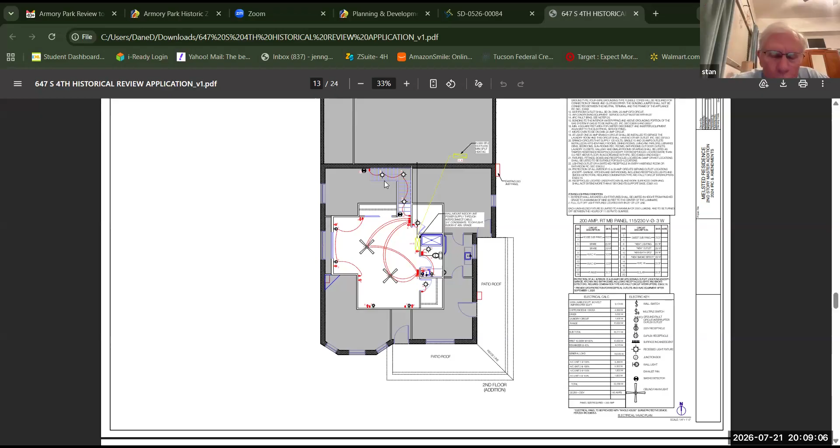Does that work, Stan? Yes. And that the skylight is flush and set at an appropriate safe height for an opening skylight, and that wood trim be placed around the perimeter of the two double hung windows.

Great, so thank you for making that motion, Stan. Do we have a second? I second. Great, Michael, do you have that? I will listen to the tapes. Okay. Not unless you want to send it to me, Mr. Chair.

Stan, do you want to type that up or email it to him? Do I want to? No, you don't have to. I'm just asking you. You don't have to, please. Michael, I'll try to do something when you put the recording on. I will send it to you anyway. Okay, very good, so we got that.

Are the Melsteds happy? We are. Is Dane happy? If the Melsteds are happy, I'm happy. Of course. All right, I'm going to call the question.

Stan? Yes. Approved, great. Martha? Yes. Jan? Yes. Maurice? Yes. Matt? Yes. Lynn? Yes. And John? I say yes. So it passes unanimously. Good luck with it. I hope PDS doesn't come up with entirely different things.

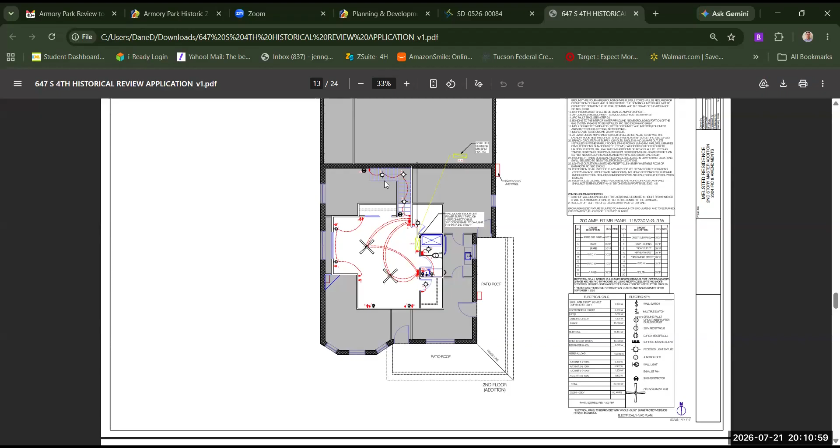And that you have a safe reconstruction project moving forward. Thank you, we would like to have a long, happy life here. It's a great house, it really is. So we're delighted that a wonderful new couple with energy has it. Thank you so much for coming. Thank you, bye-bye.

Minor reviews. I know that a pool was recently approved by Stan at 719 South 4th Avenue this month. Michael, are there other minor reviews? Item 5, yeah, I have one at 215 East 19th Street for a roof. Stan, did I send that to you yet? No. Okay, I will. And then I also have another one at 428 East 17th for a fence. I haven't gotten that one either. Okay, I'm going to send it to you and Mr. Chair.